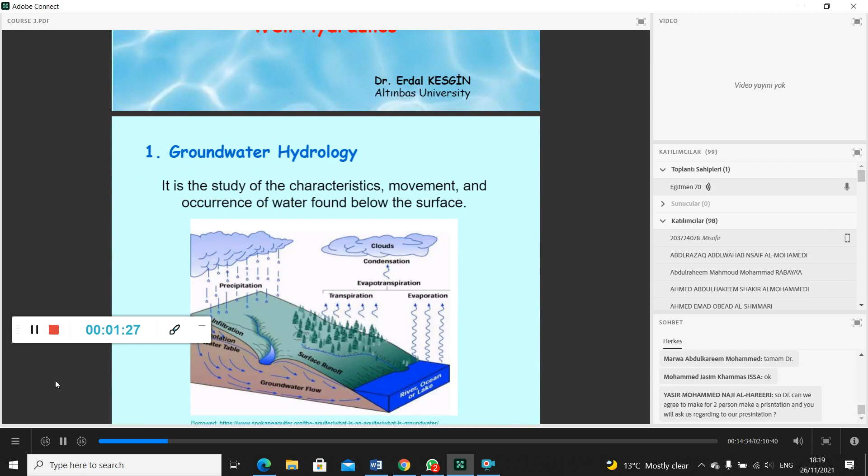Let's start with water, my friend. Okay. Well hydraulics. What is the well? This is the important problem in our water engineering: groundwater, or below the water table. In our country there are lots of groundwater wells to supply the clean water. It's very important for us, and we have to examine the hydraulics of these wells, this groundwater, as a civil engineer, as a water engineer.

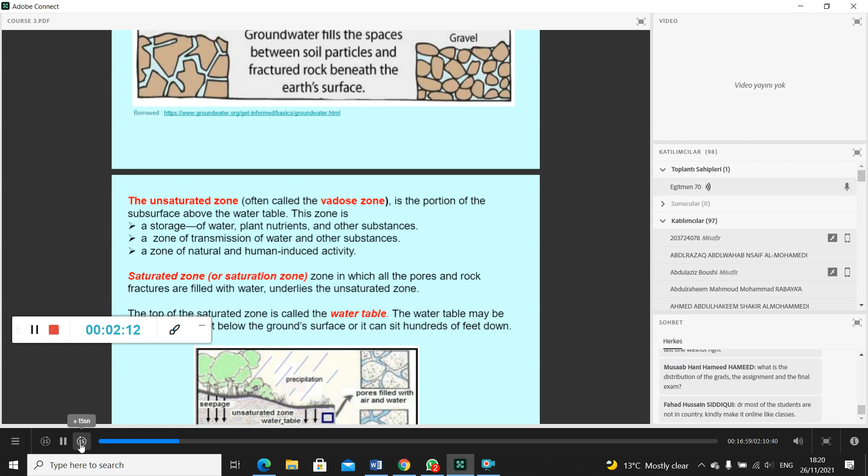Let's talk about the groundwater zone first, okay? The unsaturated zone, often called the vadose zone, is the portion of the subsurface above the water table. This zone is a storage of water, plant nutrients, and other substances, a zone of the transmission of water and other substances, a zone of natural and human-induced activity.

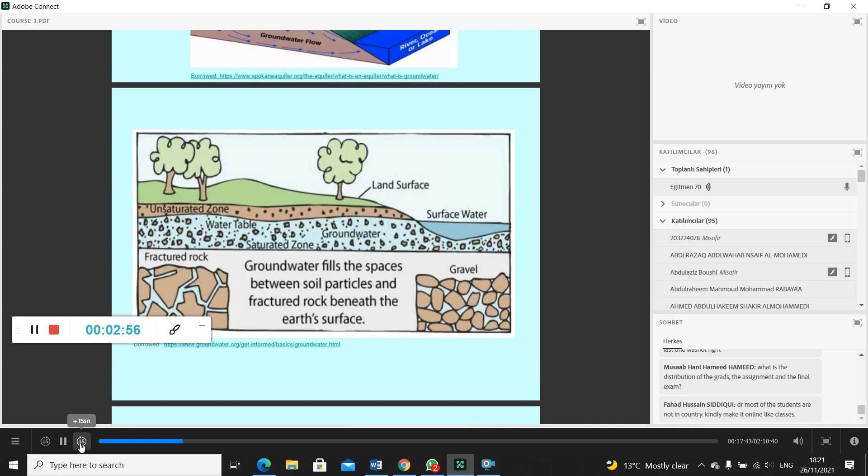Okay, and this is the unsaturated zone. That means there is no saturation. The water transmits through this zone to the saturated zone. The lower limit of the unsaturated zone shows the water table, and the saturated zone, in which all the pores and rock fractures are filled with water, underlies the unsaturated zone.

Okay, these are very important, my friend. Do not forget this zone. The top of the saturated zone is called the water table, and the water table may be located only a foot below the ground surface, or it can sit hundreds of feet down.

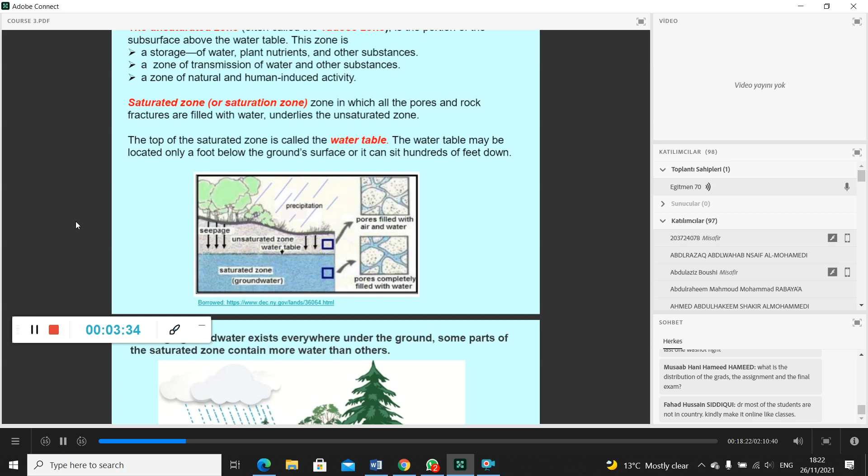You see that when the precipitation drops to the surface, first it faces the unsaturated zone or vadose zone. This is the seepage or infiltration. Through the unsaturated zone it arrives at the water table. Okay, it's important.

Although groundwater exists everywhere under the ground, some parts of the saturated zone contain more water than others. What does it mean? Just imagine the saturated zone. Not everywhere in the saturated zone contains the same amount of water. Some parts of the saturated zone have a high water content, some have a low water content.

And the important thing is, what is an aquifer? Maybe you have heard that. Aquifer is a very important term. If you know what aquifer means, you can answer most of the groundwater stuff. An aquifer is an underground formation of permeable rock and loose material that serves as a storage reservoir for large volumes of groundwater when tapped by wells.

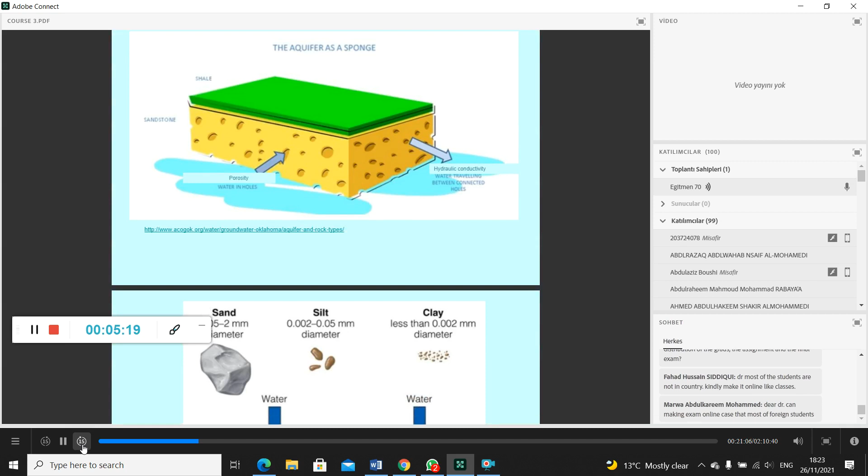Actually the aquifer is the pore structure. You see the pores, and that is the aquifer, like a sponge. You can imagine the aquifer is a sponge. That is the low permeable medium, and that is the high permeable medium, because we have a great particle diameter, maybe gravel, and that is actually a high amount of sand.

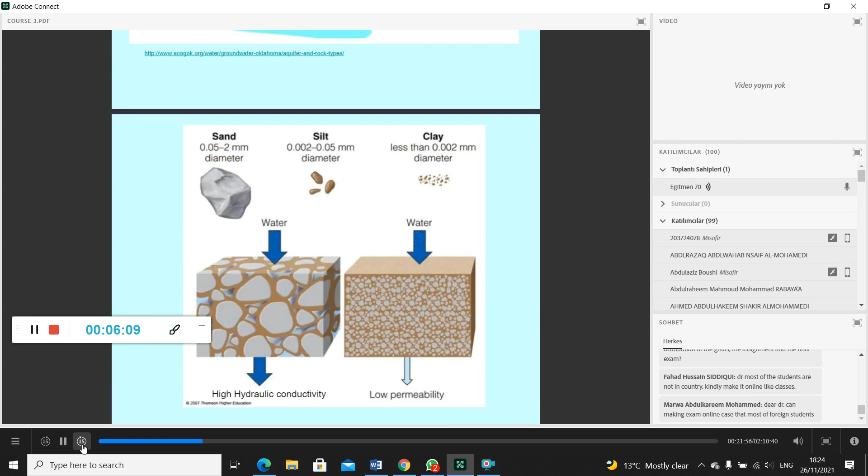If we remember these materials: sand particles are between 0.05 and 2 millimeter diameter, silt between 0.002 and 0.05 millimeter diameter, and clay less than 0.002 millimeter diameter. And from 2 millimeters we have pebble or gravel.

And what kind of aquifers do we have? In general, we have three types of aquifer, and mostly we consider two types. The first one is the unconfined aquifer, and the other one is the confined aquifer. And in the middle of these we have a perched aquifer. Generally we use confined and unconfined aquifer; we can call the unconfined aquifer an open aquifer, and the confined aquifer a closed aquifer.

Let's meet these kinds of aquifer, my friend. That is the unconfined aquifer. You see that the unconfined aquifer is bounded from below by the confining unit, which means impermeable layer, and bounded from above by the water table. There is no confining unit.

On the other hand, a confined aquifer is bounded from below and above by the impermeable layer or confining unit. It's important. You can imagine the confined aquifer works like pressured water. For the unconfined aquifer there is no upper boundary; the surface can rise.

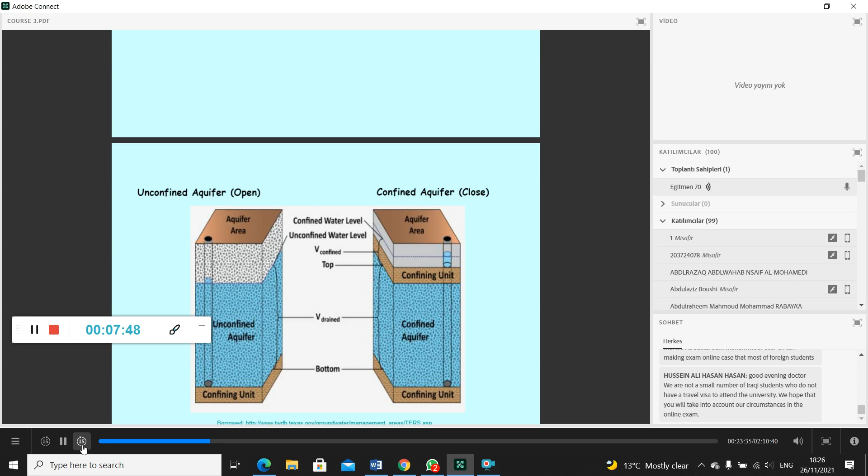Water flows downward through small spaces or fractures to fill gaps in the rock or sediment. And the position of the water table may vary due to seasonal precipitation change and groundwater consumption.

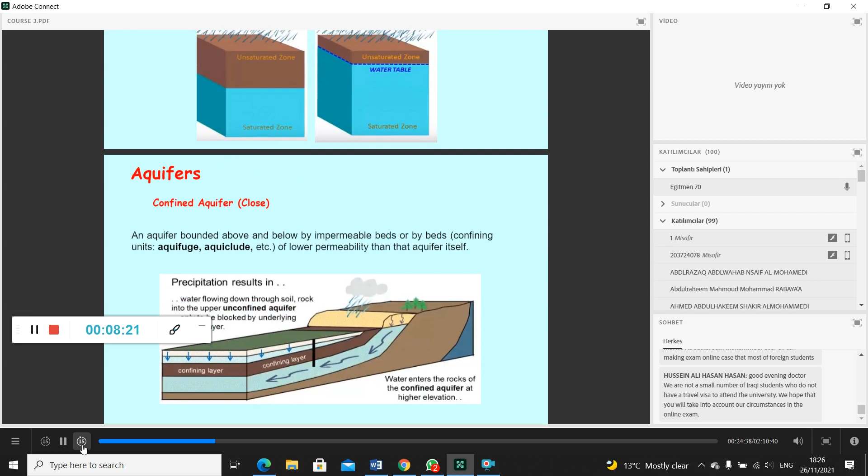A confined aquifer is an aquifer bounded above and below by impermeable layers or confining units, aquifuges or aquicludes of lower permeability than the aquifer itself. The confined aquifer is bounded below and above by impermeable layers.

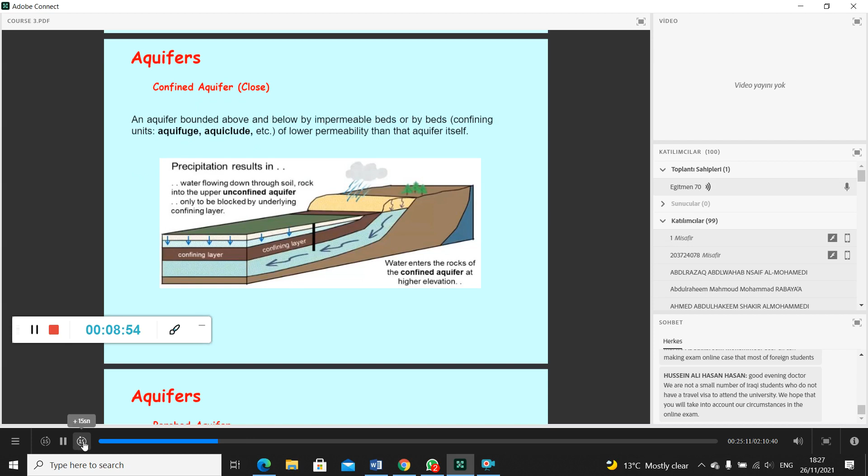One type of aquifer is the perched aquifer. A perched aquifer is a small water body situated in the unsaturated zone of soil, above the water table or main unconfined aquifer. You can imagine the perched water bodies.

Aquifers can also receive water from surface waters like lakes and rivers. When the aquifer is full of water, the water table meets the surface of the ground, and the water stored in the aquifer can appear at the land surface as a spring or seep.

Just remember the seasons. During spring or winter, the groundwater table rises to the surface or increases in water level. You can see the groundwater table reach almost to the surface of the land.

Water infiltrates faster into soil that is mostly sand than into soil that is mostly clay or silt. Almost no water filters into paved areas. Rain that cannot be absorbed into the ground collects on the surface, forming runoff streams.

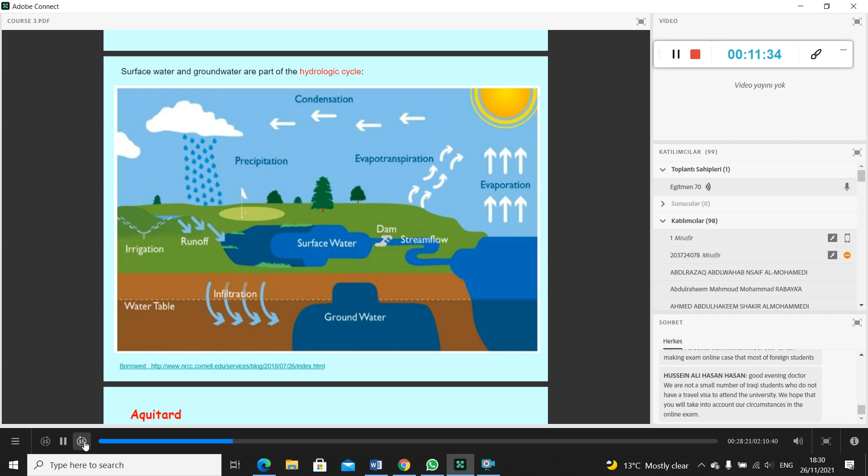After this step, we have some terms related to groundwater hydrology: an aquitard, aquiclude, and aquifuge.

What is an aquitard? An aquitard is also a saturated formation. It permits water through, but it does not yield water in sufficient quantity as an aquifer does, because of its partly permeable nature.

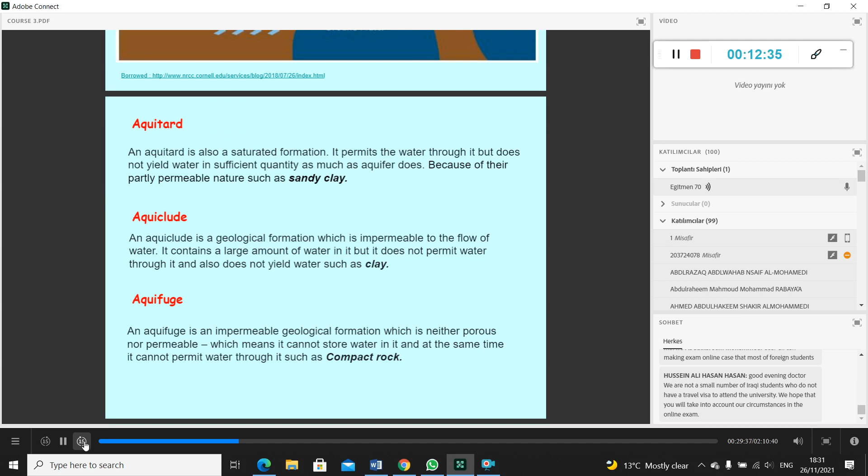An aquifuge is an impermeable geological formation which is neither porous nor permeable, meaning it cannot store water in it, nor can it permit water through. It is such a compact rock.

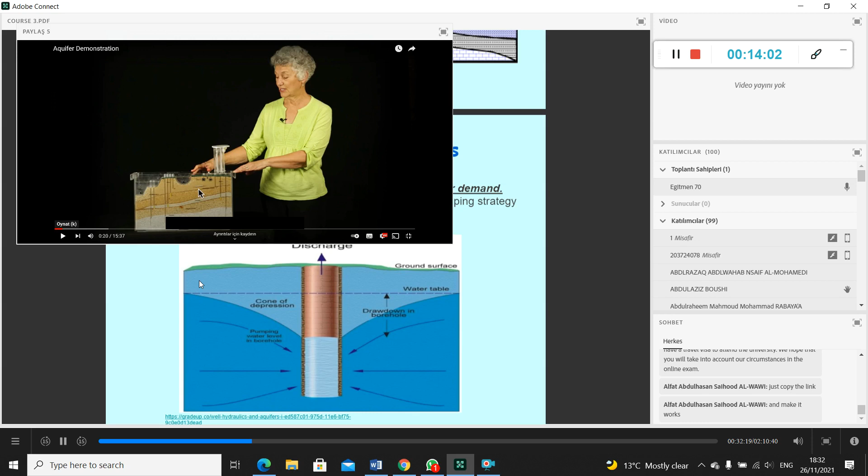Of the whole water cycle. Can you see and hear the video, my friend?

We have wells underground, and many layers of rock, sand, clay, and gravel deep under the surface of the earth. Aquifers are the layers that hold water and allow water to pass through them. The layers that don't hold water and don't let water pass through are called aquitards.

This model can show us something very important about water on our planet: it's a closed system. Every bit of water we have now is water we've always had. There's no such thing as new water.

We see that surface water and aquifer water are really all the same water, constantly recycling, made of different material, with a little color added so that you can see the movement more dramatically.

I think you're going to notice two things. One is that water moves at very different speeds in different aquifers. The other observation is that the water all moves in the same direction.

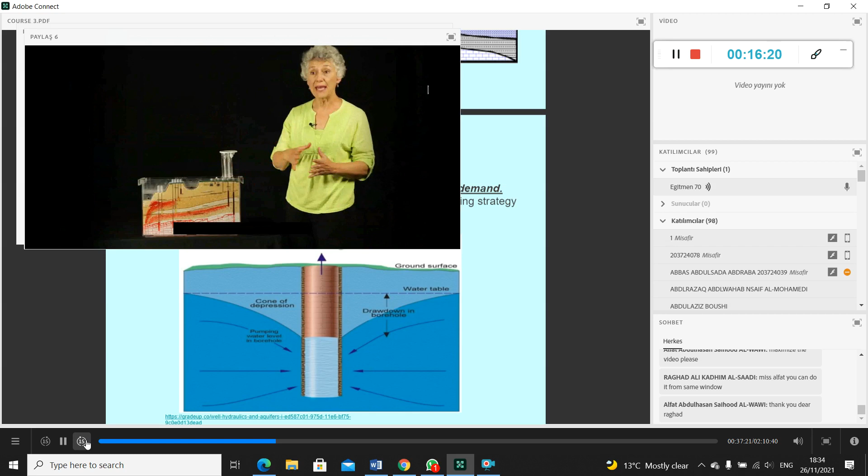Droughts and floods are very common in our region, and floods even do damage with the heavy water. When we can see it on the surface, we have to remember to keep enough water in reserve.

Water fills a well because the pressure in the aquifer is higher than the pressure in the well bore. In fact, from the model, just as that pipe opens, the water rushes in to take its place. When we pump our well, we may notice that the water level changes also in the same bottom aquifer in the model.

When I pump well 1, you notice that the water dropped in well 7. This is called the interference of wells.

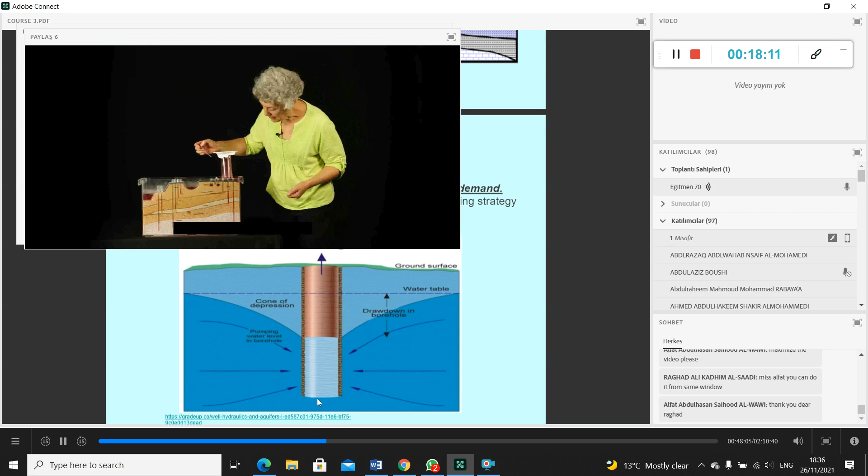That fast-moving karst aquifer that's on top, and which way is it going? It's a natural resource. Thank you.

Some of this stuff is very important for us. Just remember the video and remember that we talked about it, okay? Do not forget this definition.

According to this course, the next term is the terminology of well hydraulics. How can we design the well? How can we use the groundwater? We need a well, and we have to know the well hydraulics. Groundwater withdrawal from aquifers is important to meet water demand.

In most countries all over the world, we can use the groundwater. Therefore, we need to understand well hydraulics to design a pumping strategy to get an adequate amount of water. You see that, that is the groundwater. And when we put in the well to discharge the water, we discharge the groundwater.

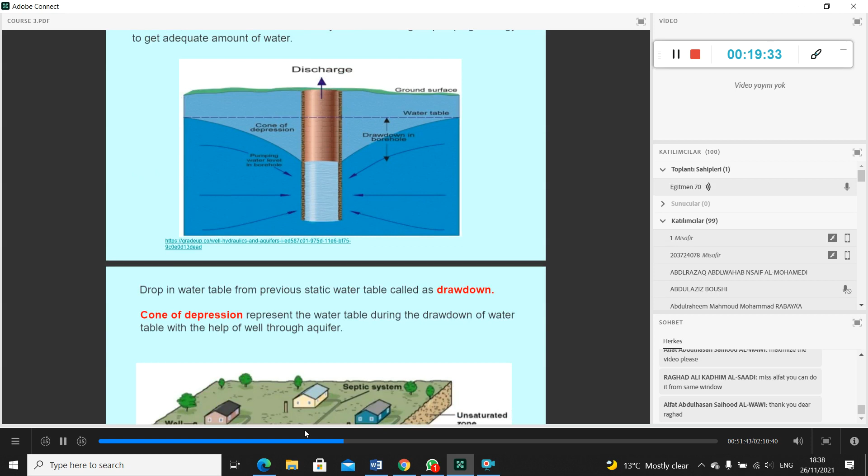If you supply water from the ground surface, the drop in the water table from the previous static water table is called drawdown, which means that if we supply water from the well, the water comes through the well and the water level starts to decrease. We define this decrease as drawdown.

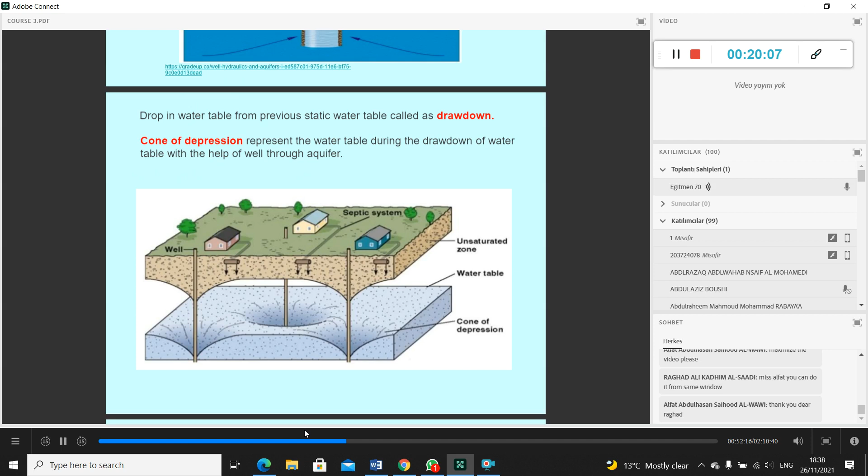And what is the cone of depression? It represents the water table, just remember the video. During the drawdown of a water table with the help of the well through the aquifer, we call the capital R the maximum distance up to which the effect of drawdown is detected.

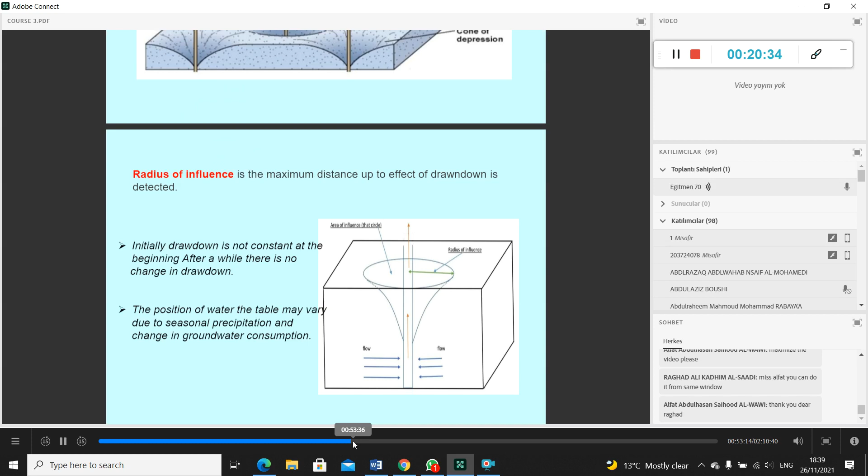And you see that one is the radius of influence. Actually, that is the radius of the cone of depression.

Initially, drawdown is not constant at the beginning. After a while, there is no change in drawdown. The position of the water table may vary due to seasonal precipitation and changes in groundwater consumption.

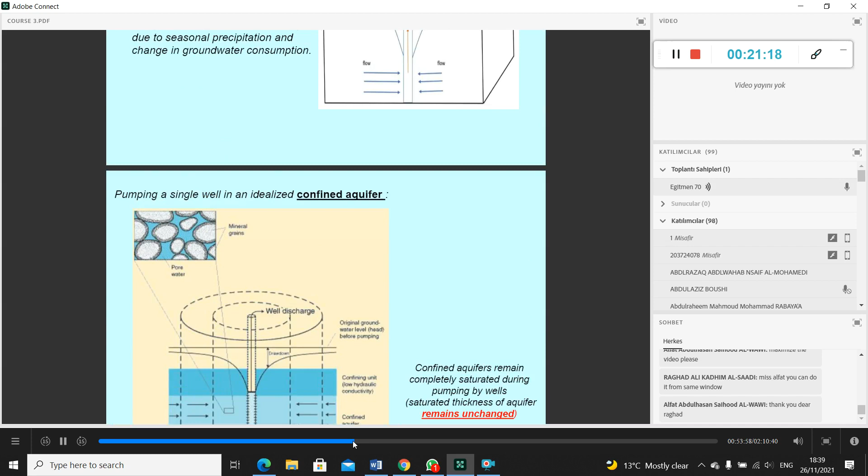If we pump a single well in an idealized confined aquifer, we can analyze this well hydraulics considering the confined aquifer and the unconfined aquifer. You see that is the confined aquifer. It's bounded from below and above with the confining unit.

If we analyze the single well in an idealized confined aquifer, we put the well and start to supply the water, and the water level starts to decrease, and that is the drawdown, that is the cone of depression. In the confined aquifer, when we supply the water, water comes to the well around this well.

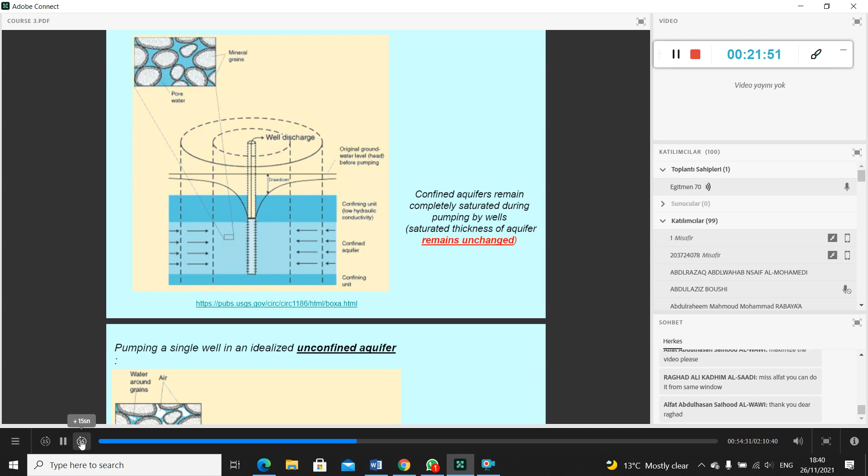If we consider the unconfined aquifer with a single well, an idealized unconfined aquifer, you see that the unconfined aquifer is only bounded from below. That is the confining unit. That is the cone of depression, the drawdown. We are discharging the water.

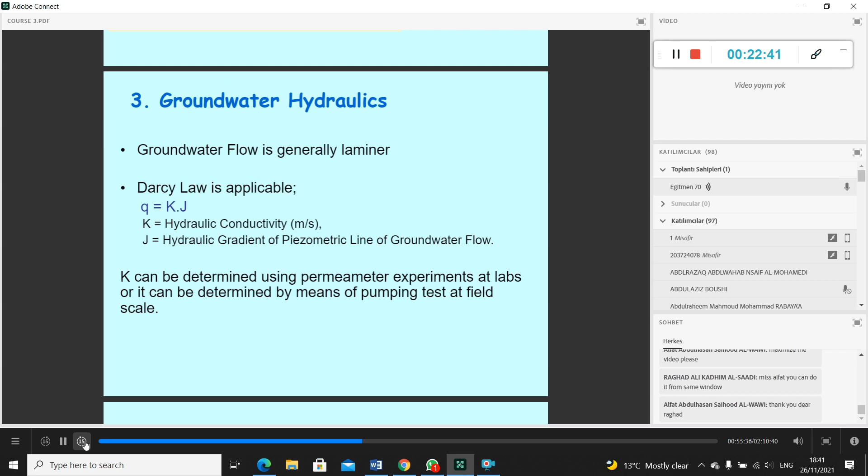Let's talk about the theoretical background of groundwater. If you remember groundwater hydraulics, groundwater flow is generally laminar flow, which means the flow is very slow, and we have layered flow. Small groundwater has a small velocity with layered flow. This is the line of the groundwater flow.

You see that, just remember Darcy's law, Darcy's law, something like that. That means delta...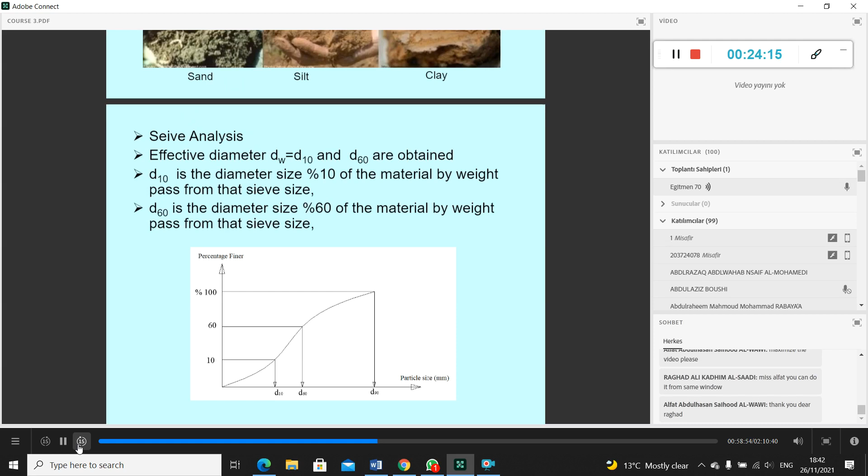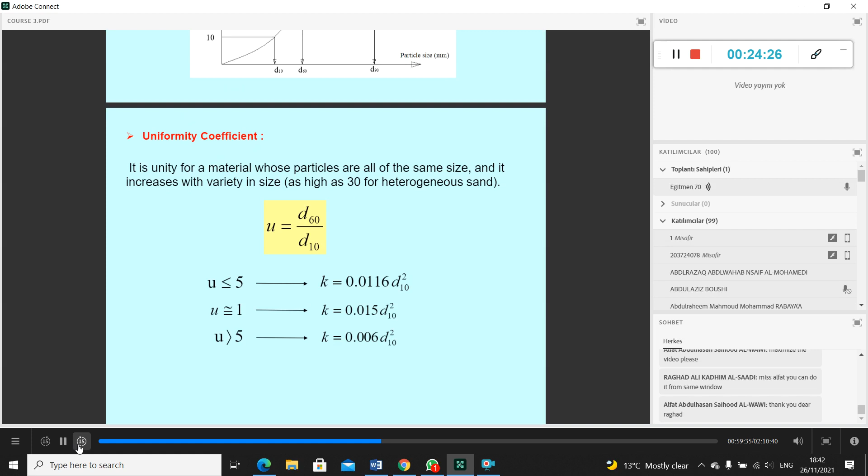We have a sieve analysis, and we can find the effective diameter of the particles, size as high as 30 for heterogeneous sand, and the uniformity coefficient can be found as d60 over d10. In case you know, calculated like that, to the hydraulic conductivity.

How can we supply the water from the ground sources? First of all, we design the well. What kind of well do we have? We have dug wells and drilled wells. Dug wells are holes in the ground dug by shovel and backhoe. Historically, a dug well was excavated below the groundwater table until incoming water exceeded the digger's bailing rate.

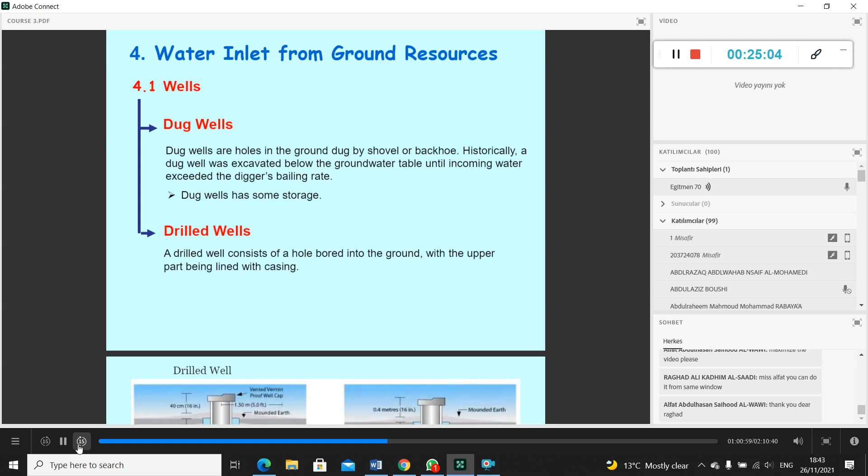The drilled wells consist of a hole bored into the ground with the upper part being lined with the casing. You see that this is the drilled well. If we focus on the well screen, remember that is the well.

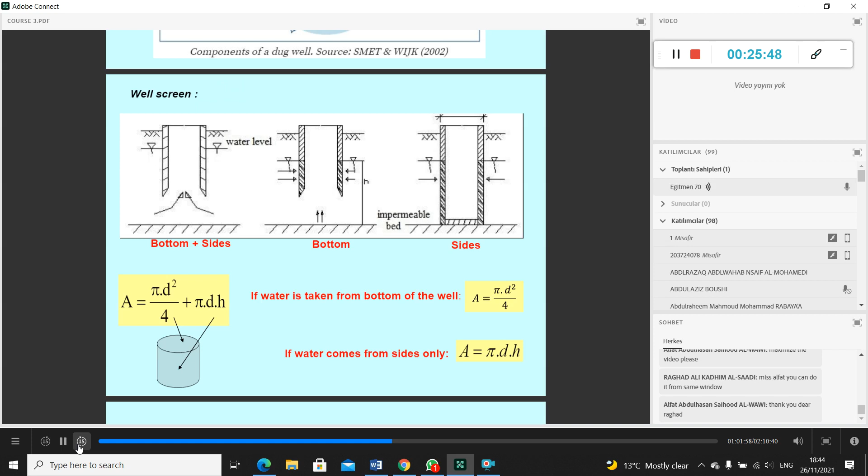If we talk about the bottom and the side, we have two ways for water to come through the well. One is the bottom of the well, the other is the side of the well. The first example shows water coming through both bottom and side. That one is only bottom, that one is only side.

Why do we do that? Because we have to calculate the cross-sectional area that connects with the groundwater. If we talk about bottom and side, the bottom area is pi D squared over 4, and the side area is pi times D times H, where D is the diameter and H is the height of the groundwater.

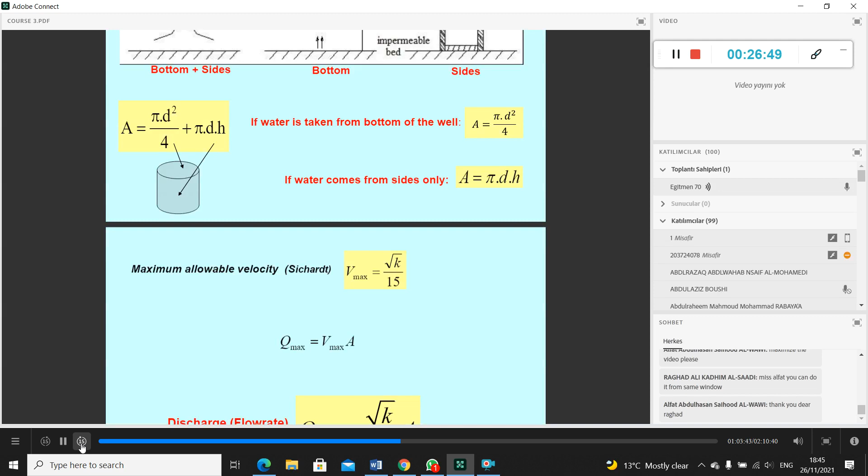So if the water is taken from the bottom of the well, A is that area. If water comes from the sides only, that is the area. And if the water comes from both, Sichardt, the allowable velocity according to square root of K, the maximum velocity, multiplied by the area.

But before we start the theoretical part, you see that?

Let's talk about the unconfined aquifer. But before we start the theoretical background of the unconfined aquifer, my friend, if you want to have a break, we can have a break.

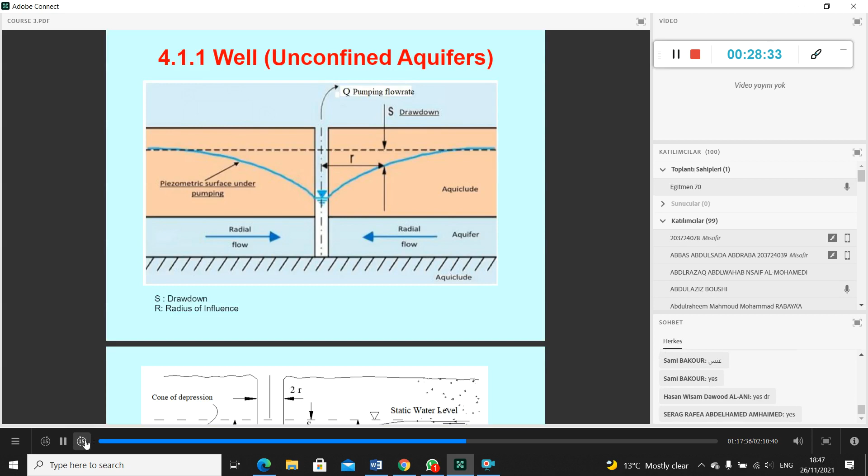At the end of the course, we can pump a flow, and if we use the Darcy formula, at the end we can obtain the pumping flow rate as Q equals pi times K, H squared minus small h squared, over ln of R over r. That is the unconfined aquifer formula, the theoretical formula.

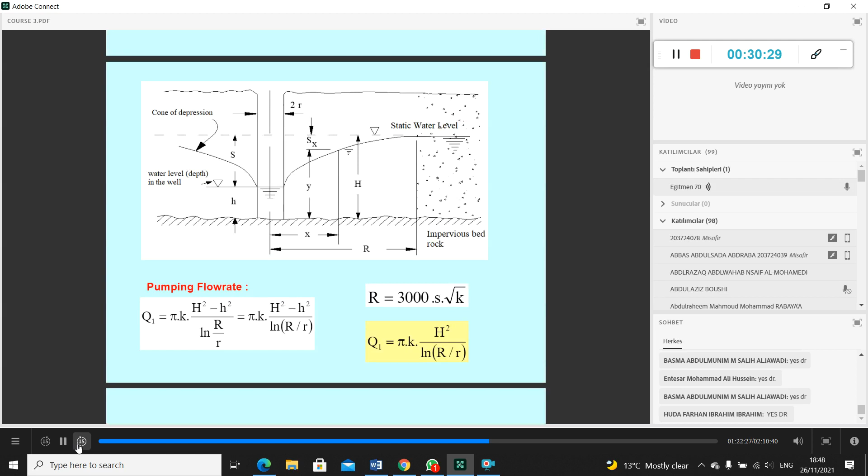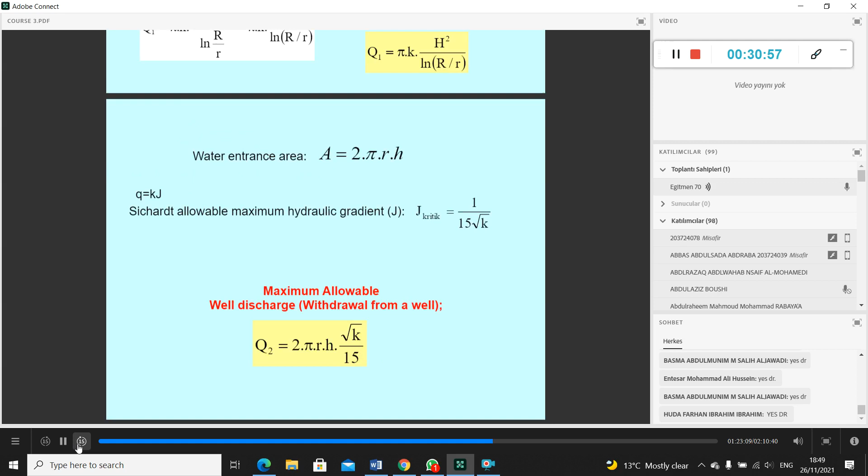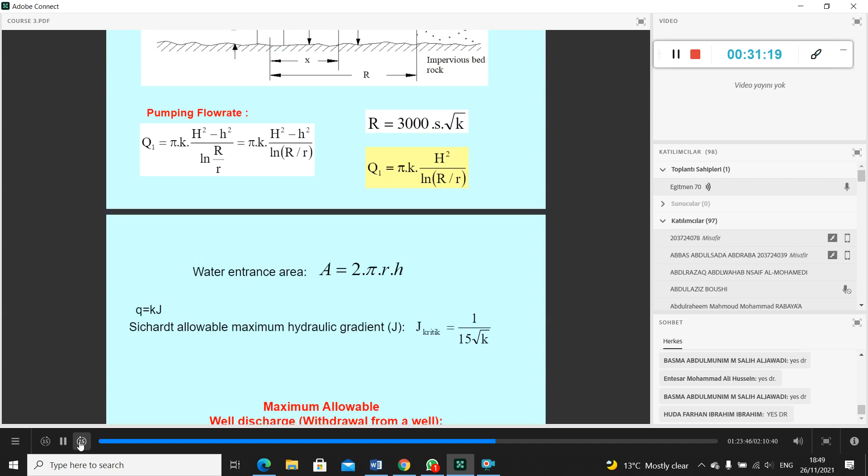That is the square root of K, over 15 maybe, which means it's constant according to these parameters, but that can be changed. If you want to supply more, it can be changed. But we have to analyze and determine both of these discharges.

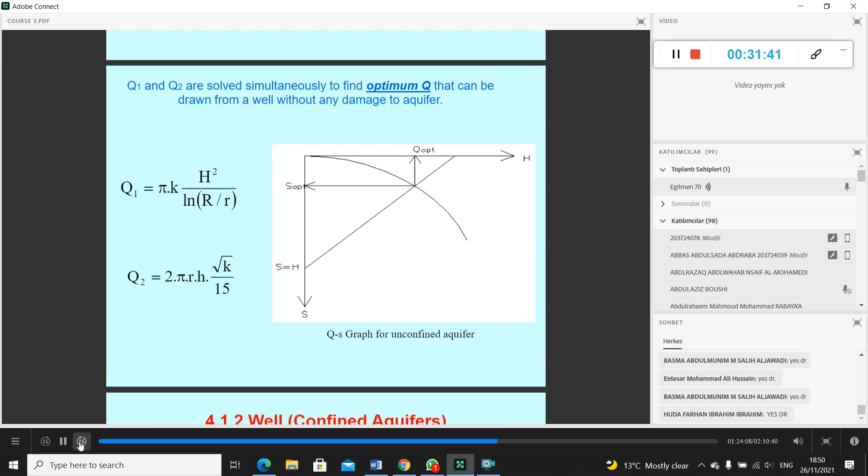We call Q1 the theoretical formula, and Q2 the maximum allowable discharge formula. If we combine these two discharges, we get the optimum discharge. That means you can supply the optimum amount of water from a well using this optimum discharge. So Q1 and Q2 are solved simultaneously to find the optimum Q that can be drawn from a well without any damage to the aquifer.

What kind of damage are we talking about? Maybe particle erosion inside the medium, inside the particles. If we supply more water, the particles move.

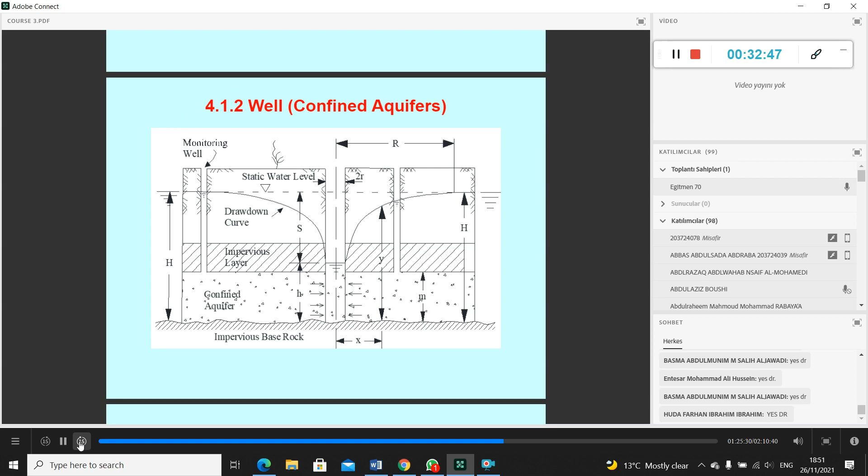You see that? Similarly, we have two impervious layers, from above and below, and we call it M. M is the aquifer thickness, okay? So the pumping flow rate can be calculated like that: 2 times pi times K times M times H minus h over ln(R over r). That is the confined aquifer formula. That one is the maximum allowable withdrawal from a well in the confined aquifer.

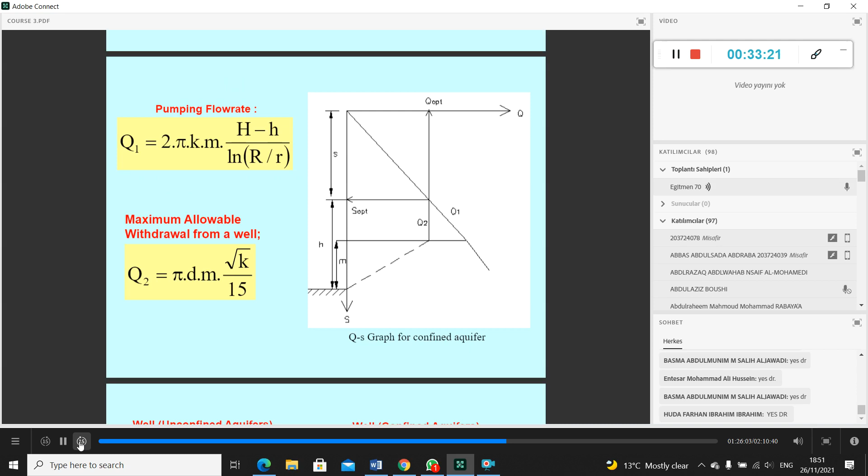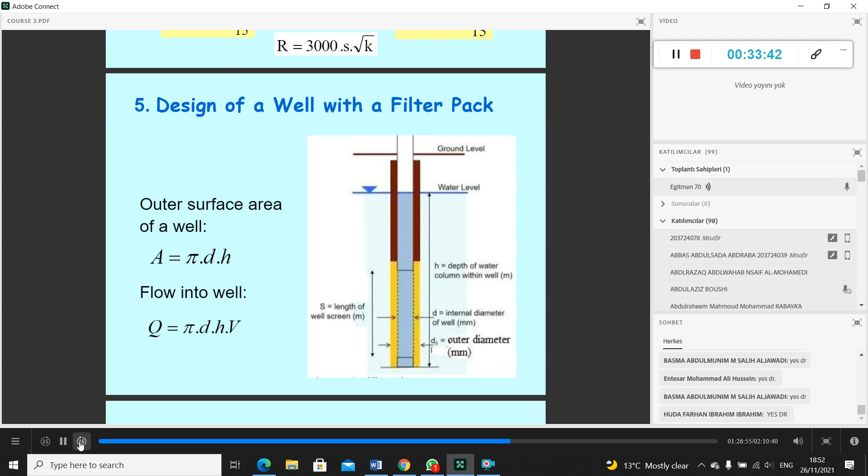So if we work simultaneously with Q1 and Q2, we get the Q optimum. So my friend, if we summarize these aquifer formulas, for the unconfined aquifer, this is our original formula. For the confined aquifer, radius of influence and the drawdown. So the outer surface area of the well we call pi times D times H, flow called the maximum allowable velocity passing through the filter holes, and the velocity passing through the filter holes according to particle size of the filter zone.

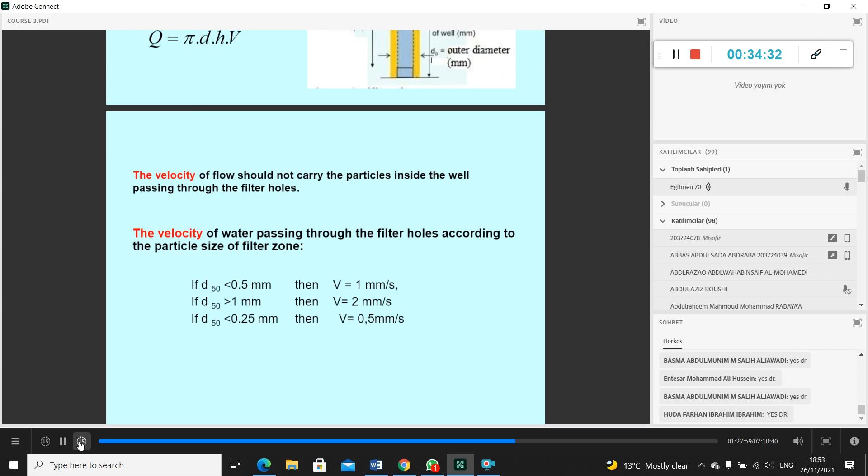In general, if the effective particle diameter D50 is less than 0.5 millimeter, the approximate velocity is 1 millimeter per second. If D50 is greater than 1 millimeter, the velocity is almost 2 millimeters per second. And if D50 is less than 0.25 millimeter, the velocity is approximately 0.5 millimeter per second. Okay?

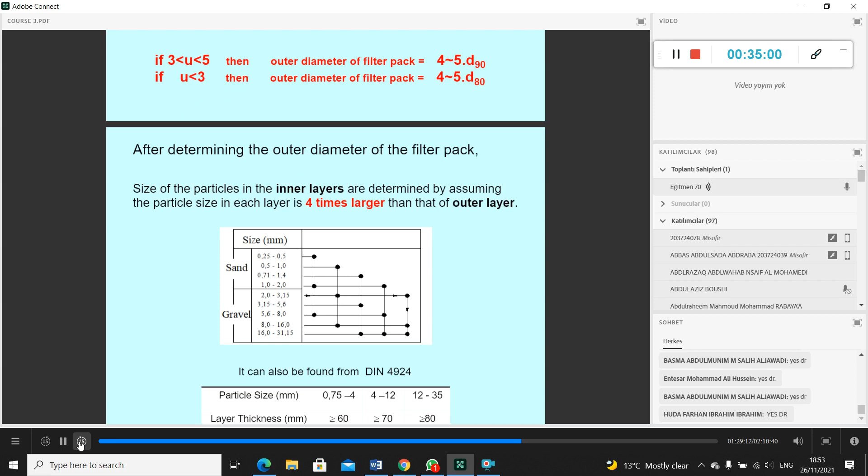By using sieve analysis, the diameter of the filter pack is determined. After determining the outer diameter of the filter pack, sizes of the particles in the inner layers are determined by assuming the particle size in each layer is 4 times larger than the outer layer. You see that, which means from the DIN standard, this can be changed according to these standards, and it can be 4 times larger when we compare the inner layer and the outer layer.

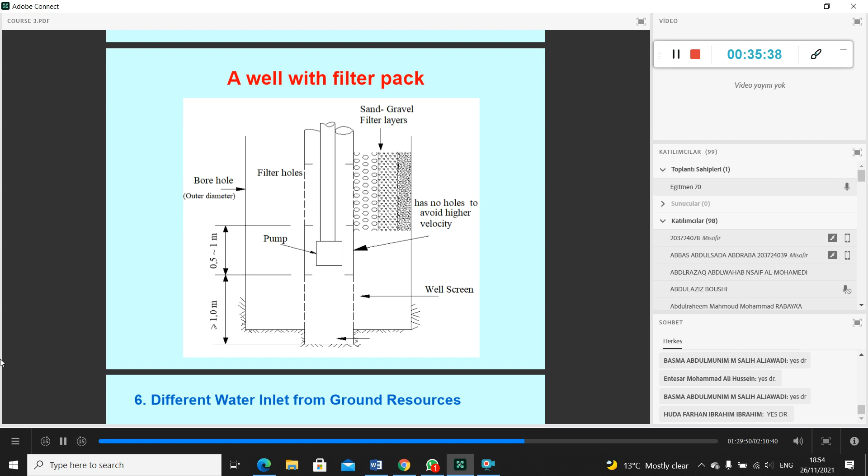And that is the well with the filter pack just around the well, and we have a sand gravel filter layer. You see, that is the pump. We put the groundwater hydraulics, my friend. One more topic about this groundwater hydraulics.

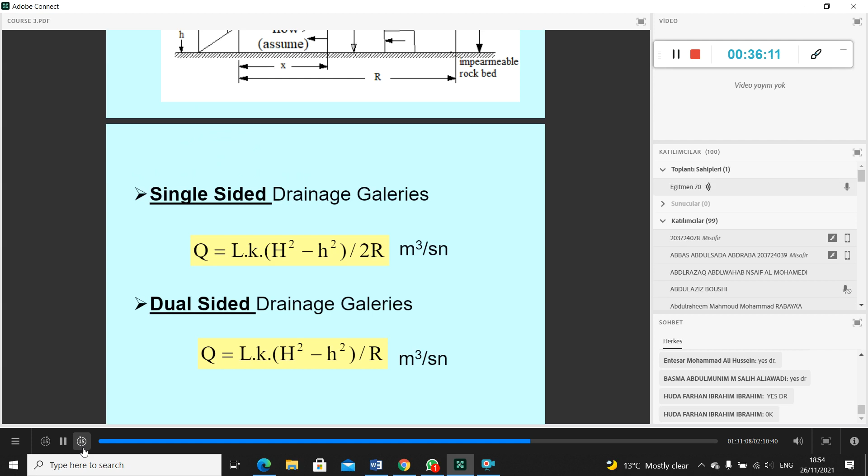This is the different water inlet: Q equals L times K times (H squared minus h squared) over 2R, cubic meters per second. L is the length of the drainage gallery, K is the hydraulic conductivity, H is the static water level, h is the water level inside the gallery. If we have dual side drainage galleries, Q is equal to L times K times (H squared minus h squared) over R.

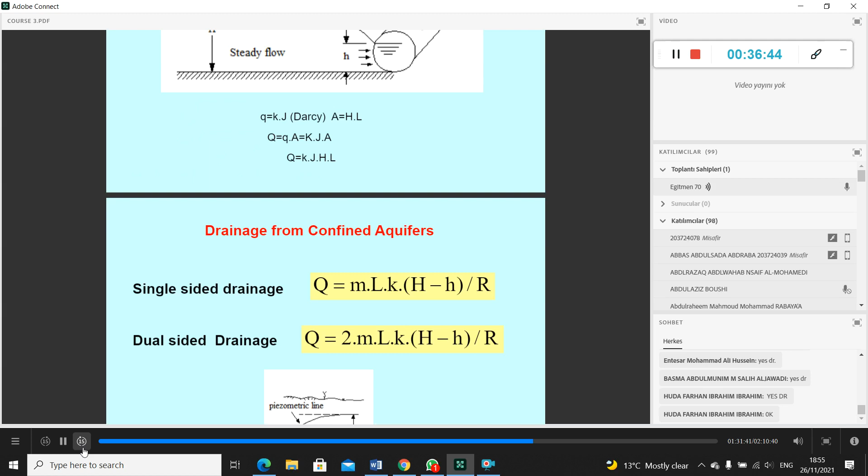And one more different resource. If the water table has a gradient, flowing groundwater, you see that is the drainage system. Okay, that is the drainage pipes, drainage layers. Drainage from the confined aquifer, single side drainage, Q is equal to M times L times K over R. Dual side, 2 times M times L times K over R. Drainage system, we put the drainage pipe, and that is the filter pack. Okay, that is the drainage galleries and different resource from the groundwater.

Any question, my friend, about these rules, these formulas? Which parameters in these formulas?

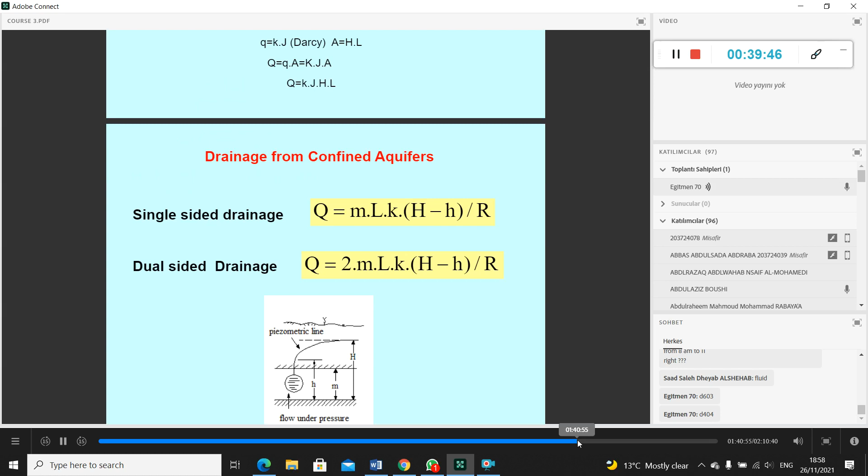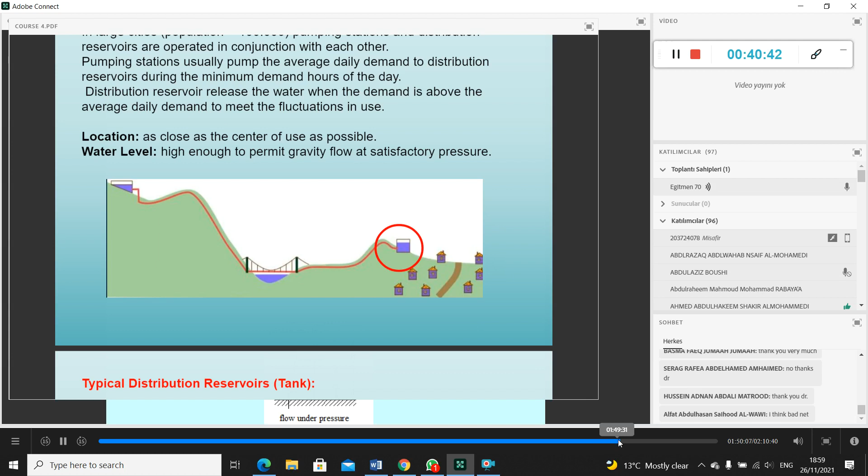If we finish the water transfer resources or the irrigation. You see that, the water transfer. This is important, my friend. What is the functionality of this reservoir? It means this: we are talking about the 100,000 people. Pumping station and distribution reservoir are operated in conjunction with each other. Pumping station usually pumps the average daily demand to the distribution reservoir during the minimum demand hours of the day.

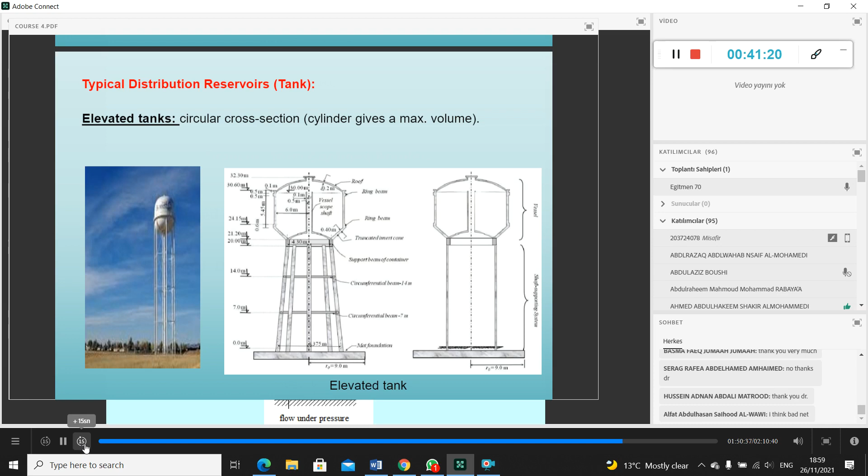It means this, to meet the fluctuation, that is the water tank. Elevated tank, you see that. Maybe you can see around your surfaces. Elevated tank, circular cross-section cylinder gives a maximum volume. You see that. Elevated tanks.

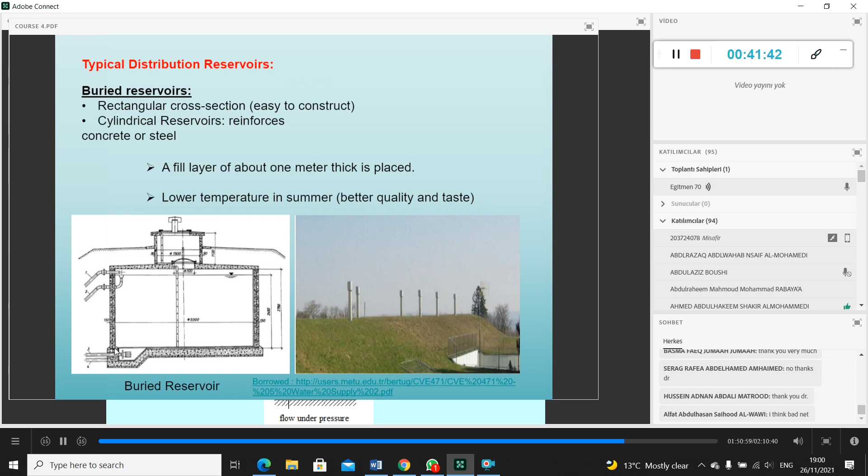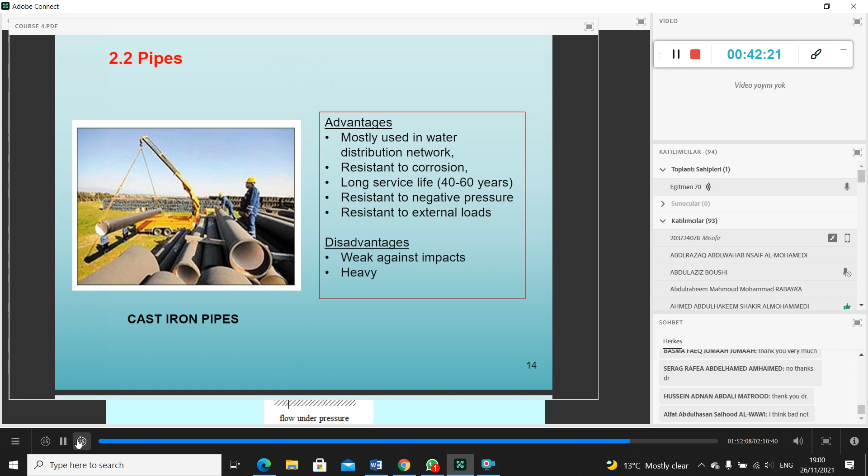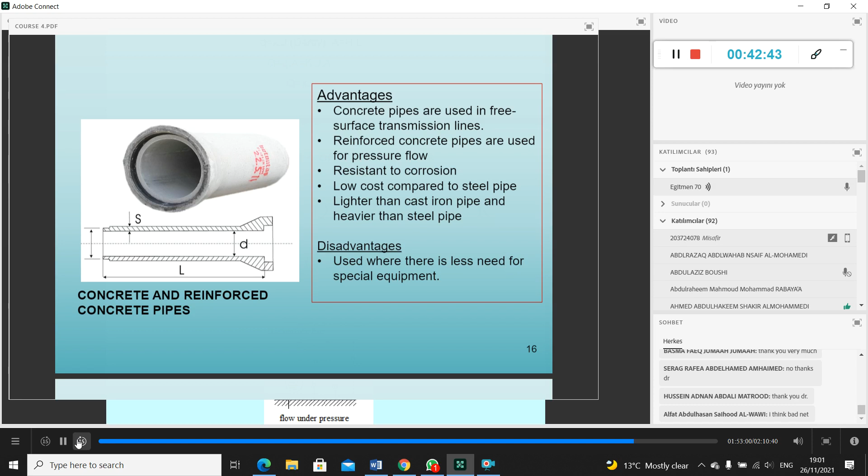According to İlbank, the İlbank is the regulation community in Turkey, diameters of 50 millimeter, 80 and 100 millimeter are not recommended. To determine the appropriate pipe diameter, keep in mind that it must be bigger than the above values. First of all, flow rate is calculated. First of all, we have to find the flow rate for the water transmission line. For the gravitational transmission pipe, pipe diameter is determined according to existing head. If the calculated diameter does not exist commercially, the next bigger pipe diameter is chosen.

Why do we say that? This is the order of the calculation. First of all, we determine the flow rate using the population, using the unit discharge, available or not. If it is not available, we can choose the commercial one.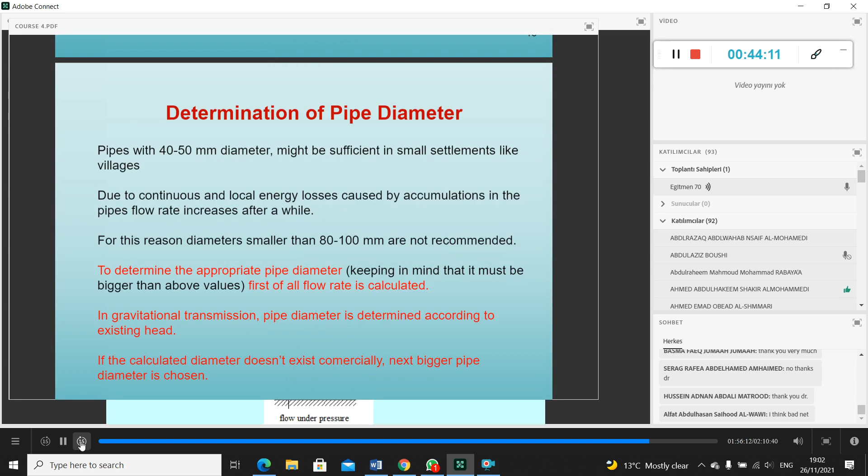Velocity limits in the water transmission line pipes. Velocity values in this pipe should be high enough to prevent settling of the suspended solids. The critical value for achieving this is approximately 0.6 meter per second. At the same time, the velocity should be small to avoid internal corrosion of the pipe, and the critical value for achieving this is 1.8 meter per second.

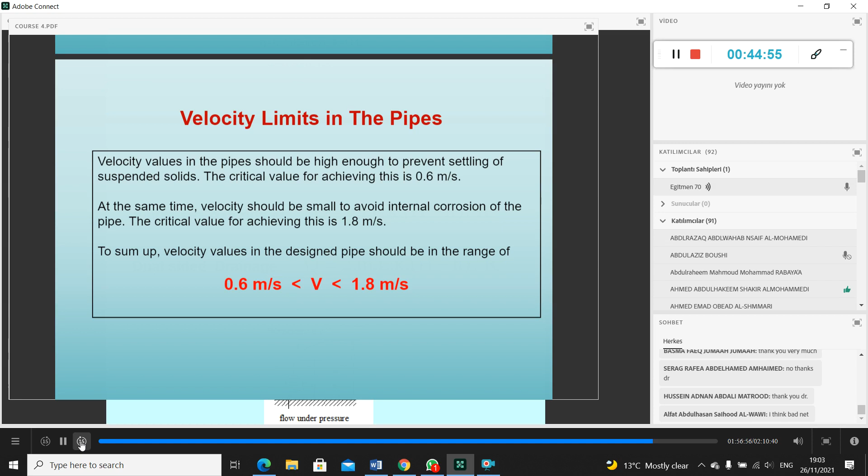Actually, my friend, these values can be changed according to the type of pipes. But in the exam, in the problem, we will give the minimum and the maximum range in meters per second. You see that.

Okay, that is the alignment, this is the component of the pipe. Why do we put this alignment? Because when we design the water transmission line, this line can be approximately 2 km, 1 km, 2.5 km, and we have f times V squared over D 2g times L, okay? That is the continuous energy losses. In long transmission lines, local energy losses are neglected.

If you remember from hydraulics, we have two kinds of energy losses. One is the local head losses, the other one is the friction or continuous head losses. In general, for the water transmission line, we can use the continuous energy losses.

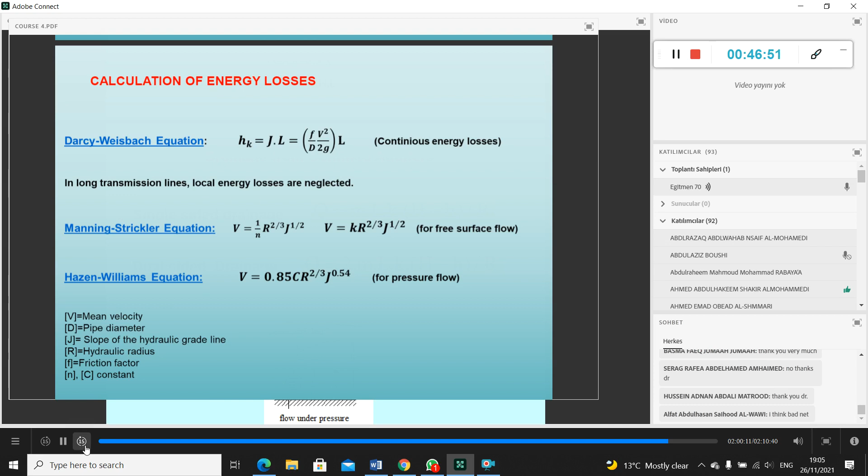One important note to calculate these formulas: R, the hydraulic radius, is the ratio of the channel's cross-sectional area to the wetted perimeter. The area is the wetted area; the red line is the wetted perimeter. So hydraulic radius can be calculated as A over P.

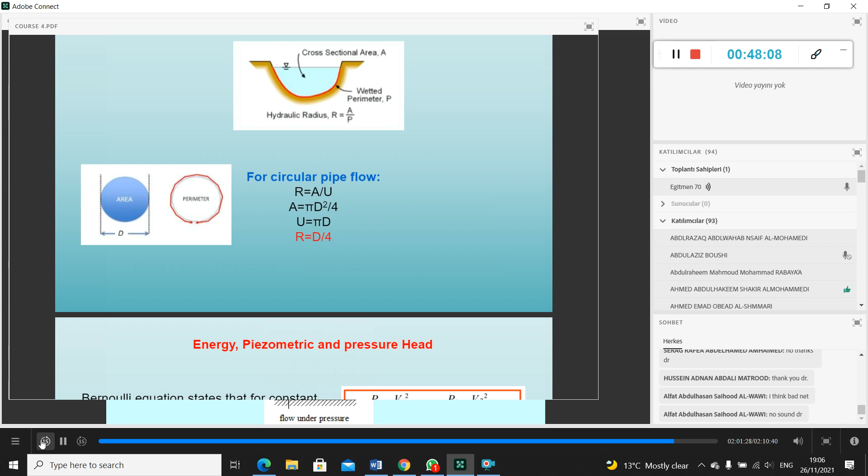For the circular pipe, R is A over P, area over perimeter. The area is pi D squared over 4. The perimeter is pi times D. So for circular pipe flow, hydraulic radius is equal to D over 4. Do not forget it, my friend.

And one more thing, for the energy, the piezometric and the pressure head: if you remember, the Bernoulli equation states that for constant flow, the energy balance between two pipe cross-sections can be written as the geometrical head, pressure head, and velocity head at any two points being equal. But for the energy equation, we can add the head losses.

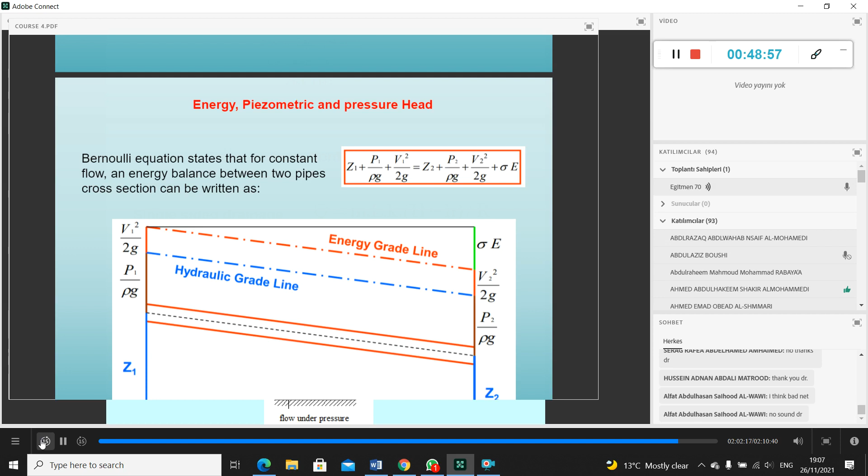That one is point 1, that one is point 2. Point 1 energy is equal to point 2 energy plus head losses. So we can draw the hydraulic grade line and energy grade line. You see that, okay?

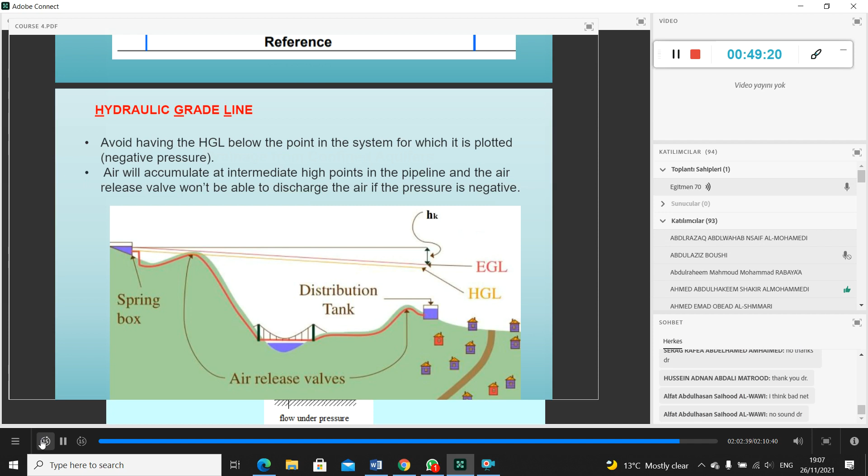Hydraulic grade line, we call it the HGL. Avoid having the hydraulic grade line below any point in the system, for which it would indicate negative pressure. The hydraulic grade line and the energy grade line show the energy or piezometric levels at each point in the system. Okay?

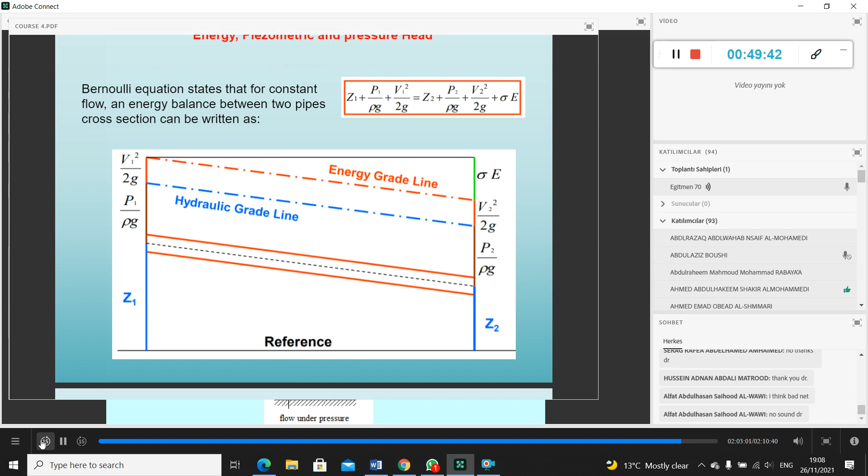Hydraulic grade line shows P over gamma plus Z. Energy grade line shows P over gamma plus Z plus the velocity head. Okay.

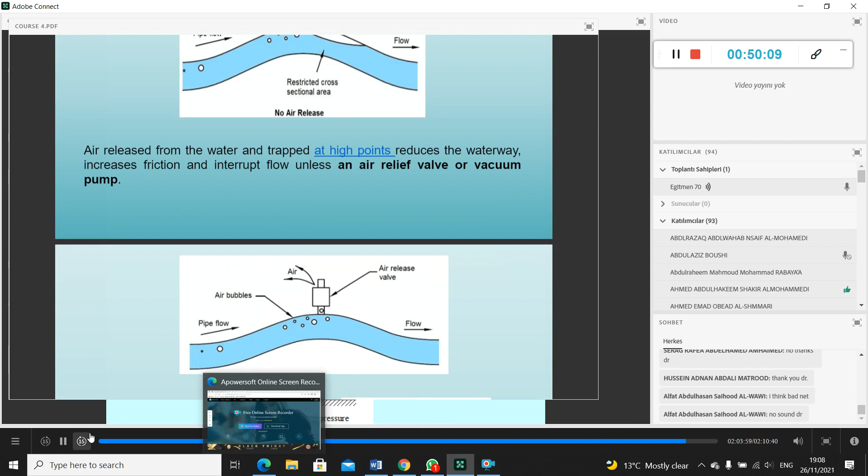And one more component is the blow-off valve. The blow-off should be located at the lowest points of the water transmission line to drain out the water for the maintenance.

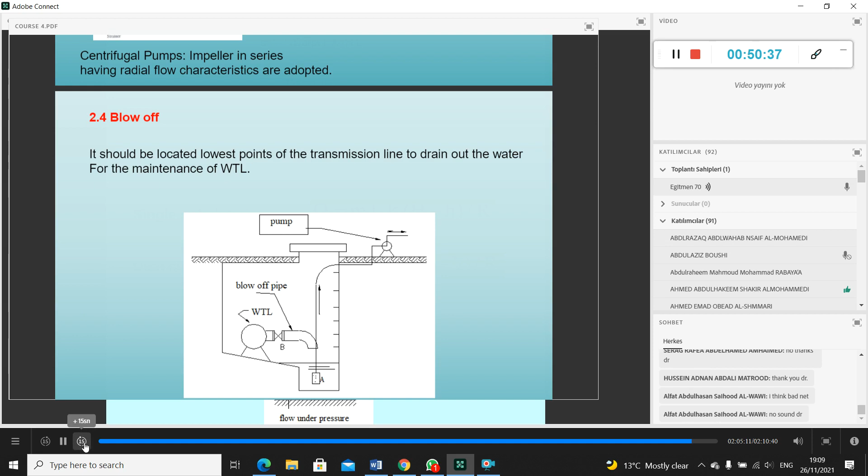Yes, one of my friends says there is no sound. Okay.

The other component is the pressure decrease room. We call it the PDR. According to the type of the pipe and the pipe connection, there is an allowable maximum pressure inside the water transmission line. If these conditions are not obtained, pressure is decreased to atmospheric pressure using the pressure decrease room. As in free surface flow, in the PDRs the outlet pipe must be right below.

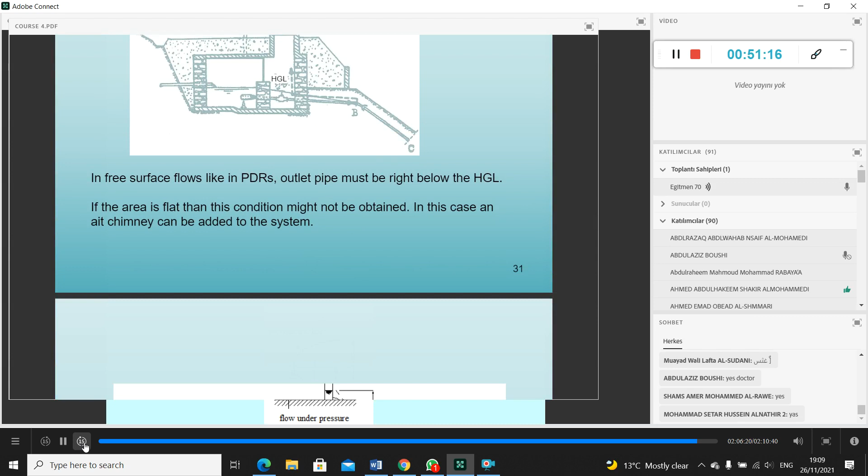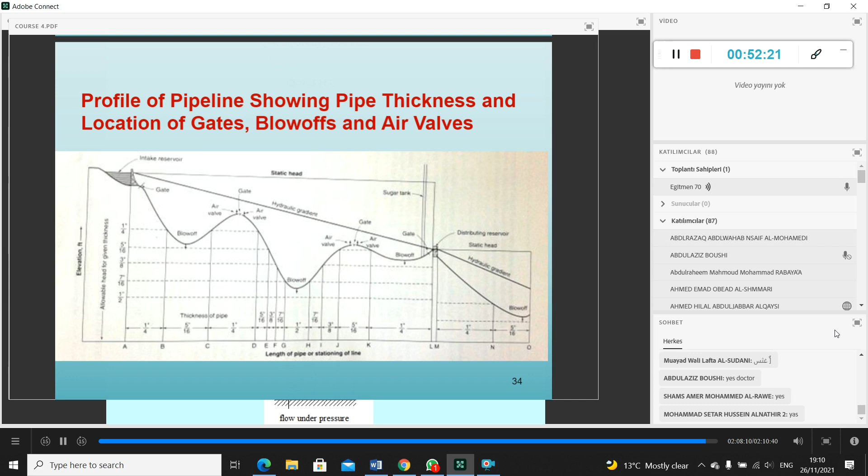And finally, you should see the cross section of the water transmission line. Profile of the pipeline showing the pipe thickness and the location of the gates, blow-off and air valve. Okay, that is our source. That is our water transmission line. We put the blow-off valve, air relief valve, blow-off, air relief valve, and then that is the hydraulic grade line. That is the static grade line. These are the lengths of the pipe, the stationing of the line.

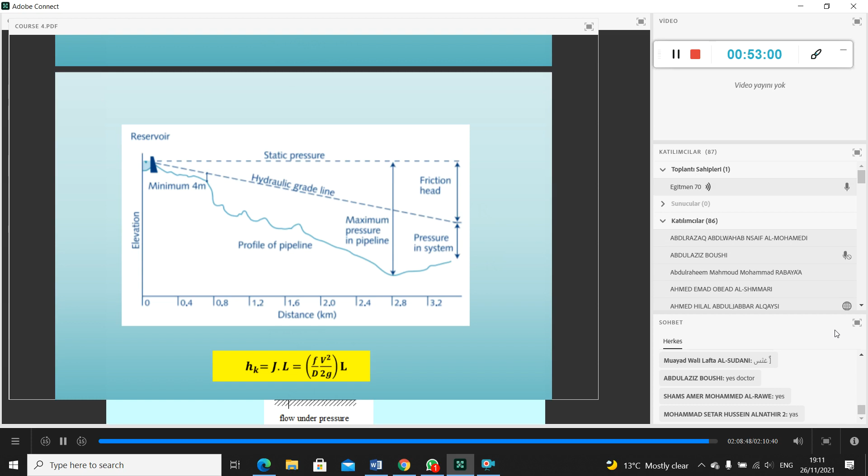Similarly, these are the details of the water transmission line, and that is the design of the transmission line. You can calculate the head loss using the Darcy-Weisbach equation. And one more thing. Again, that is the reservoir, and that is the hydraulic grade line, static pressure. We can observe maximum pressure in the pipeline at the lowest point. You have to check that point. If you exceed the maximum pressure, you have to use the pressure decrease room to reduce the pressure.

Okay, my friend, actually this is enough for today. We can continue the design of the transmission line next week. So far, do you have any questions? Actually, this is the introduction, the beginning of designing the water transmission line. We talked about groundwater. Next week, inshallah, we will solve problems about groundwater and the beginning of the water transmission line. Any questions, my friend, for today?